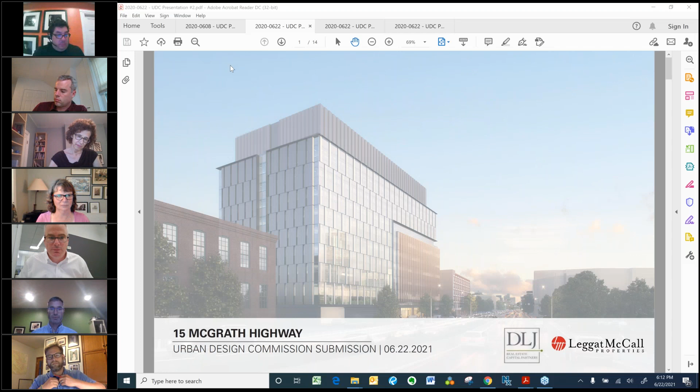All right, so in the interest of time, we're gonna get going here. Again, I'm Mike Gerhardt, I'm the development manager with Leggat McCall Properties. We've got John Sullivan and Ian Ramey here with me as well. John's gonna do the bulk or all of the presentation, supported by Ian. So if he could share his screen, that would be fantastic. We're just really excited to be here. Last time we got the massing approved, and we're moving on to facade here. So with that, I will quiet up and let John go for it.

Great, thanks Mike, good to be back in front of the commission. Can everyone see my screen? Okay, great, thank you. Okay, I'll run through the presentation.

I thought the last session was very productive, and the feedback that we received was really helpful and pushed the design in the right direction in a way that we feel has really improved what we're planning. Let me just move through these initial slides. Last time we had introduced our team, and we really just wanted to highlight what we heard at the last meeting. So we spent a lot of time describing the building, describing the site constraints, which played into a lot of why the building is shaped and located where it is. And our takeaways were that the jewel box was approved.

In terms of the massing approach, we had offered 3 massings, and this one, which we had titled the jewel box, was the preferred one that I think everyone agreed responded best to the site conditions and site opportunities. But what we heard from the commission was that, within the context of this massing, the jewel box piece, which we're trying to emphasize in this important gateway corner, was not differentiated enough and didn't make itself distinct from the rest of the building.

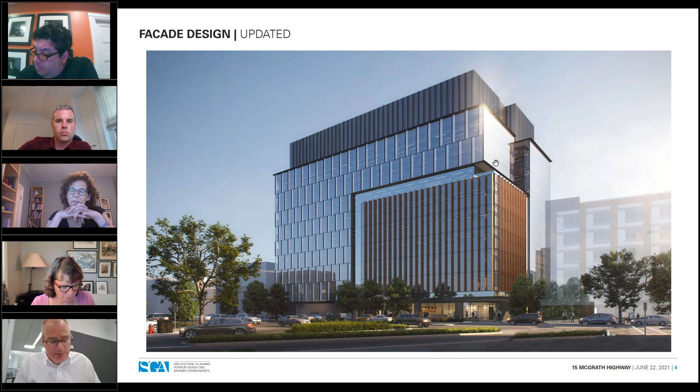So again, looking at the corner element itself, the bigger ideas were focused on materiality, verticality, and separation. But I think an important thing to note is that we've also looked at it proportionally.

So there's a strong horizontal base datum that we've established, which you'll see some more imagery of as it ties into the entry canopy. And then we took this element and lifted it up a little bit off of it. I think you'll see through some of the detail, it feels a little bit more comfortable. Previously, we had the heft of the jewel box coming right down to that horizontal datum, and it felt heavy. This, I think, plays to further emphasize the distinction of this corner.

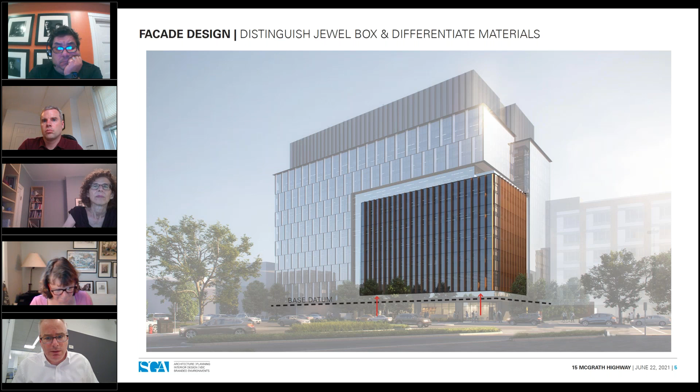So again, just to talk about some of the more detailed moves on the primary facade, we have fins and accent panels that introduce a kind of motion to the facade and create a single story rhythm with some horizontal elements that trace around the building.

At the jewel box element, we've added warmth and texture, and a vertical emphasis that carries past the floors to really express the jewel box as a whole.

And then we've also changed or introduced a little bit more detail to our mechanical penthouse, by providing a vertical, stepped, angled panel that we feel ties into some of the verticality of the jewel box and provides a little bit more of a scalable, stepped approach to the top of the building.

Getting a little bit closer, you can see some of the depth relationships, the typical fins, the accent panels, that give the primary facade some depth, and again that motion that we referred to.

You can see the transparency of the notch, which is inset, but also is contained by these larger wrapping moments to really accentuate that depth, which we feel is a nice break between the two volumes. And then you can see the depth and rhythm of these warmer fins, which we find very interesting.

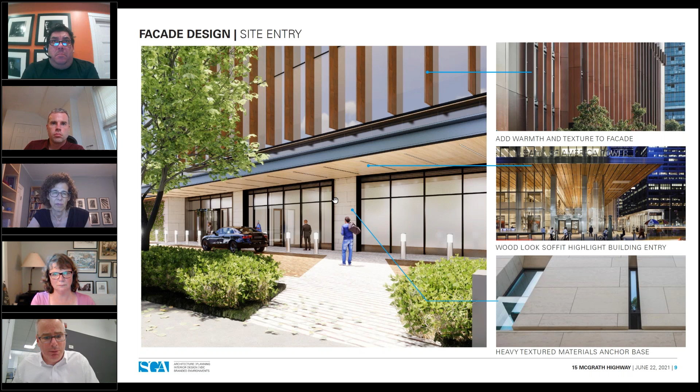Some of what we've already described, like the interest and distinction of the jewel box itself, the presence of that notch, the rhythm of the primary facade with these stronger wrapping elements. These wrapping elements actually turn the corner and contain this facade, expressing as a notch on the other side, so that this facade can break down into two volumes.

We've turned the glass around the corner for a module, and incorporated the same pattern that's experienced on the front facade around the corner, but inverted it so that there are more solid panels with more narrow windows, while keeping that same rhythm.

These are intended to be metal panels that relate and finish to what's being expressed on the primary facade of the building. So we feel like this reads more as a unified volume, which serves to further pronounce the corner and use these notches to create a nice relationship between the volumes.

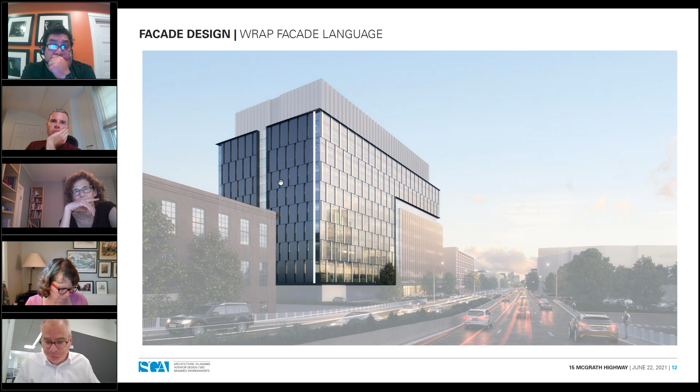But this gives you a sense of the notch on the more solid side of the building, and a similar treatment towards the community path where that main portion of the building turns the corner, and these framing elements start to hold some of the facade on this side, with another notch introduced here.

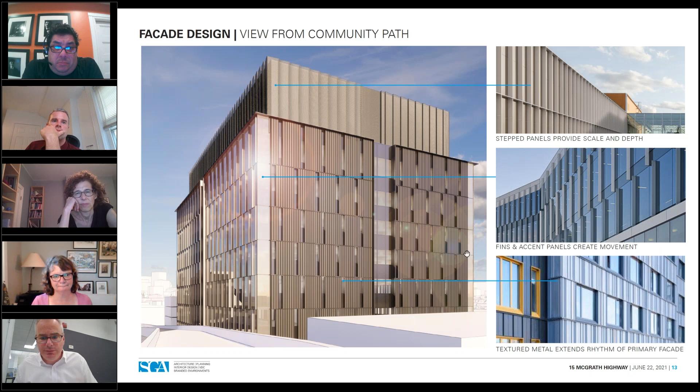So with that, we just wanted to share that as an update. We're excited by the evolution. We feel like it was very helpful feedback to receive last time, and we feel like we're in a much better place than we were during the last meeting, because now we feel like that jewel box really does provide a distinct difference from the remainder of the building.

So with that, I'd like to open it up for questions, and we're happy to share other images from the last meeting and some other supporting material if that's helpful.

So the penthouse, what is the material? You said it's more related to the main body of the building. It's a little hard to tell. It feels a little between the copper color and the whatever. I can't quite tell what it is. It's sort of warm, so I can't tell what it's aligning itself with.

Yeah, no, it's a great question. I think it would be a little bit more of a pewter feel, kind of a darker gray, but with a little bit of a warmer tone. But it's meant to tie to some of the darker gray framing elements and fins that are on the body of the building. So it's meant to speak to the body of the building, but the vertical depth and rhythm plays a little bit off of these fins.

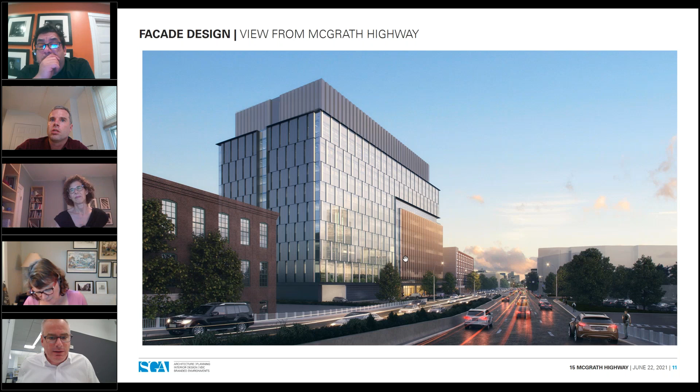Thank you. And John, you also mentioned that notch would be inset, the glazing there from the adjacent facades. Is that right? It is, yeah. I'll just try to move to that image. It's in about a foot. The notch is in about a foot, but the fin that wraps it is also out about a foot.

So I think it presents itself like a 2-foot inset moment. And there's a little play in that dimension, but it's meant to be a break, but we're also using that wrapping element to emphasize that a little bit more.

So maybe I'll jump in first. I think overall the organization of the facades and the clarification of materiality have really come a long way since the last meeting, and I think really make for a much stronger and better building. I really like the introduction of the warmer material, the vertical fins on the jewel box piece, the separation of it from the adjacent facades, the notch, separation from the canopy below, and also the clarification of what you've done at I guess it's the western corner, adjacent to the more solid side of the building with the glass wrapping, and a similar patterning between the solid and more transparent facades that still makes it feel like one building, but clearly something separate related to the specific adjacencies and design of those sides.

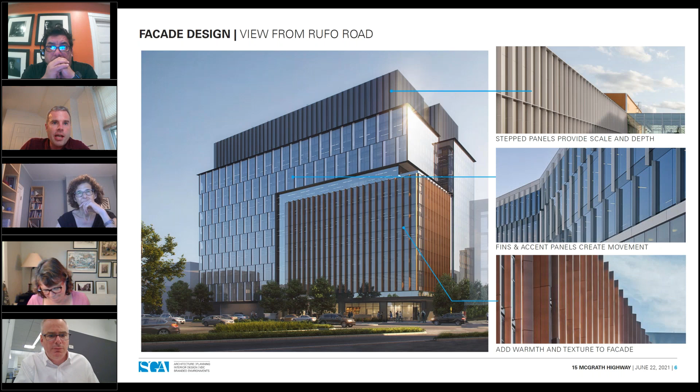I had a couple detailed questions. One was on the canopy. You had the view looking into the entry. And I wonder, so there's the canopy, which again, I think is really nice, is an organizing element, separating the jewel box from the ground plane. It appears that it's extending kind of to the left side of this image, beyond with a green wall below. Could you talk a little about that and the idea for what's going on there, the separation between the ground level and the floors above?

Yeah, sure. No, that's a good question. So this is the canopy, and this carries all the way to the corner, kind of the far end of the jewel box. And from the last presentation, everything to the entry into page right is our active kind of front of house program. So the canopy we pulled out to identify that and to give some more depth there. It's also how people will arrive, and it gives them a little bit of cover as part of that arrival experience. And then everything to the kind of page left of our entry is back of house uses.

Last presentation we talked about some of the constraints on the ground floor and how we needed to organize it. We were pulling this out to emphasize this side of the building as our more active side, and this reveal creates a consistent horizontal datum that felt comfortable. This serves more as a channel to support the primary facade above it, then returns a modest amount to allow that wall to sit in. That will be mostly a solid wall, but we feel it's a good opportunity for planting or some kind of definition.

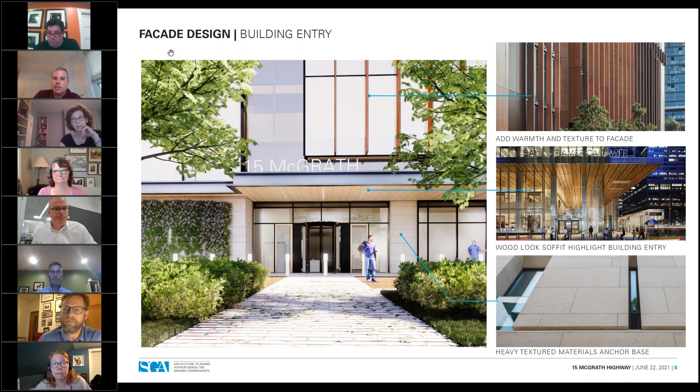I think that sounds great, it sounds like all the right discussions are happening. I'd love to hear from Ian about what's going on inside the property line, but ultimately where I'm going is just hoping there is flexibility inside the property line to accommodate whatever's happening outside it, especially if that sidewalk needs to expand inboard of the property line or shift in to accommodate planting at the curb edge or whatever the width of the cycle track is going to be, or however else that section evolves. So would it be better to review this once things have settled down a little bit, or do we feel there are things that aren't going to change no matter how things settle?

I think there are things that aren't going to change, in as much as the entryway, the easement across the front of the property. It might be that primary car traffic goes in the Rufo Road side and truck traffic comes in the jug handle area, but essentially it's going to remain mostly the same. It's more about the movements that might actually change as to which vehicles go where. But what you're seeing as public realm, right in front of the building, the front door, I think will remain the same regardless.

Yes, thank you, perfect timing. So I'll be quiet and let Ian go.

Hi everybody. This is a plan blow-up that shows what's happening between the McGrath right of way and the front of the building. As John touched on during his presentation, we're really trying to have a welcoming pedestrian experience and turn that shared drive condition, that vehicular condition, into something that feels pedestrianized, that feels like a plaza, with some active patterning that's interesting and engaging and leads the eye towards the key entry into the building. The landscape strip along the property line is about 15 feet wide, as currently shown.

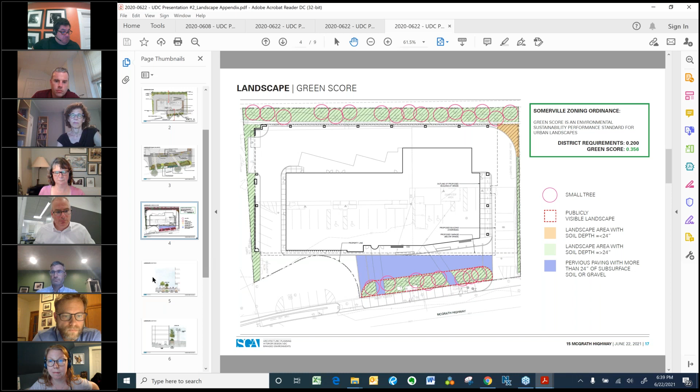We haven't really indicated how the bike lanes and the bus configuration works yet, because we don't really know exactly what that final layout will be.

We did show the idea of a street tree. We met with PSUF a couple weeks ago with Louisa and Andrew. They asked us to look at potentially coordinating with DOT when the time is right to see if we can have some street trees within that 10-foot wide public sidewalk. Again, with a caveat that we don't really know what DOT is going to end up doing ultimately, but it would be nice if we can to have some street trees there.

And then within our property line, you can see that raised planter element, the planting mass that we have there, and then that wide kind of shared drive that engages with the first floor recessed use.

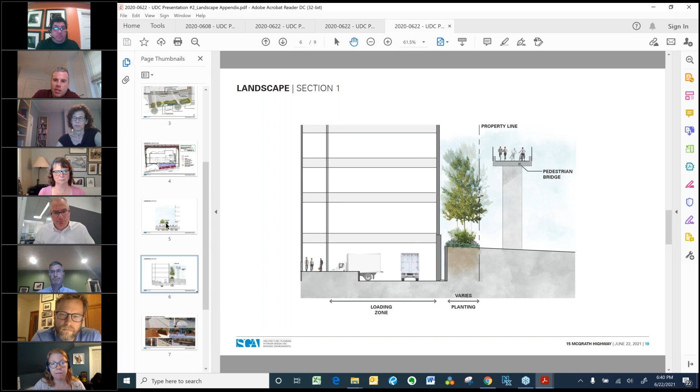So is there the flexibility to take that back of sidewalk line and move it into the property line, which would shallow up the width of the planting strip?

Well, right now it's a 10-foot width sidewalk from the property line to the existing curb. The preliminary plans that we saw looks like they're maintaining that 10-foot width of sidewalk, and everything else that they're proposing is kind of outboard of the curb, basically putting McGrath on a road diet, getting that infrastructure from the curb face towards the main part of the road. So hopefully we can kind of keep the sidewalk line as it is and not diminish that buffer too much.

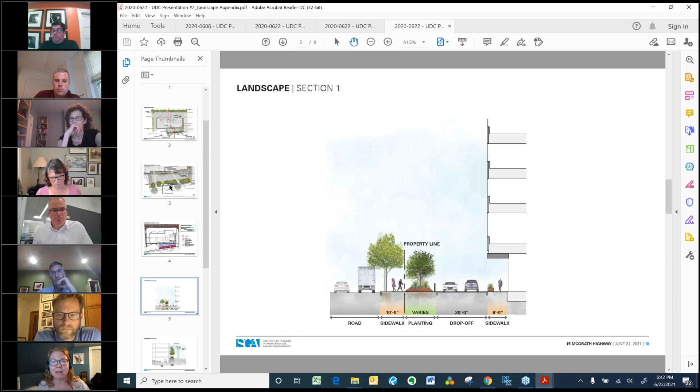I would encourage you all to really think about someone that's waiting for a bus. I know sometimes the floating bus stops, they're pretty small. If someone is shopping at Star Market and they have a carriage, something like that, they're going to wait for a bus. It's likely that they'll actually wait around the sidewalk area and lean on your planter, maybe sit in your planter, sit on your address sign wall. So I would encourage you to think about, in relation to where you want your nice planting to stay nice, that you think about someone waiting for the bus. I mean, they'll probably even sit on the Bluebikes station. So just think about the users, the public using the bus stop.

Sure. Yeah, I think there's opportunities that we can maybe introduce some dedicated seating shelves sort of integrated with the planters potentially.

I really like the planted buffer. I like the idea of tying in the materiality to the facade material, the vertical fins and the planter walls. That could be really nice as well.

It feels like the building itself is very buffered from McGrath, but for the pedestrian realm, the sidewalk isn't. So I get, if McGrath's going on a road diet and we're losing a travel lane and there's the opportunity outboard of the curb to add a dense row of street trees and buffer there, I guess that changes that. But I went out there after our meeting two weeks ago and took a walk down the sidewalk there, and it really is brutal as a pedestrian realm today.

Yes, I guess that's what I'd like to see, a real buffering element in between the travel lanes on McGrath and the sidewalk walking space.

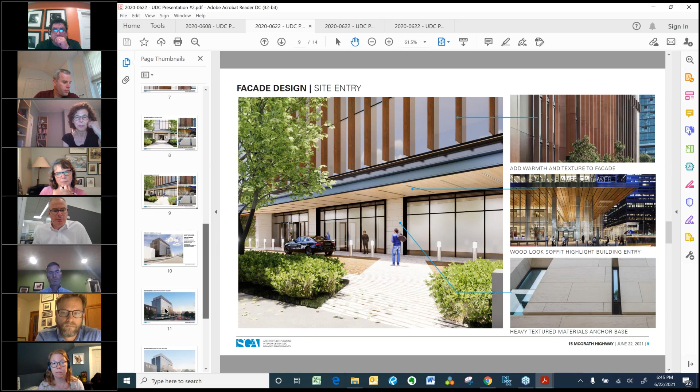And I really appreciate actually the view from on McGrath looking towards Boston. It's the relationship of sort of that facade becomes sort of solid because, if you're tight enough up to the divider, you see it as a solid in relationship to the brick building, and maybe the brick building in the foreground.

Yeah, so I feel like it starts to tie in. I was going to ask, can it repeat anywhere else? And I love seeing it repeat in the landscape, where it actually becomes a tactile thing. So I think that's really good.

I think the area that needs more development for me is where the main facade turns the corner to the more solid, short facade. It's sort of not taking from the language of the section that divides the jewel box from the rest of the building. It doesn't, so it's not framed the way that is. And the rhythm, the alternating verticals that appear on both facades, which I think is nice in themselves, but the way it's resolved as the corner turns isn't successful yet.

I feel like should that solid thing step itself, or should it be framed? Or should it even turn as glass? I'm not sure I mind it actually not turning, the glass not turning, those being framed sections. So I think they have a good pattern, scale, material relationship with those two facades - one becomes more solid, the other's more open. So I would encourage you to look at that corner because I think it's not here nor there.

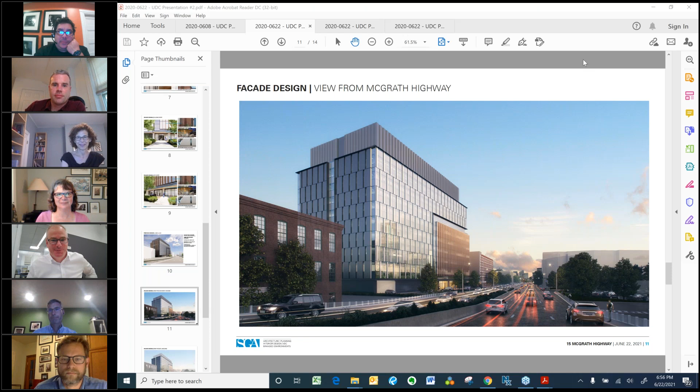All right, well, thank you, everyone. 43 minutes, not bad. Congratulations. Thank you, everyone. Appreciate it. Thank you, John. Thank you, Mike. Thank you very much, appreciate the commission's time. Great, have a good evening. You too.

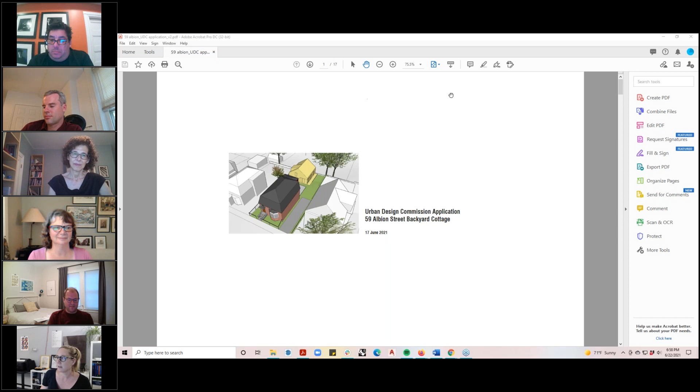So hi everyone, my name is Marilyn Modinger, and I am the architect for this project at 59 Albion Street. We are about to get much smaller in scale than the previous project. I'm curious, I think we understand that we are the first backyard cottage to go through this process. Is that true? Okay, hooray, here we are. Yeah, we've had our first neighborhood meeting, which went very well, and we're excited to present to y'all tonight. So I'm gonna jump right in.

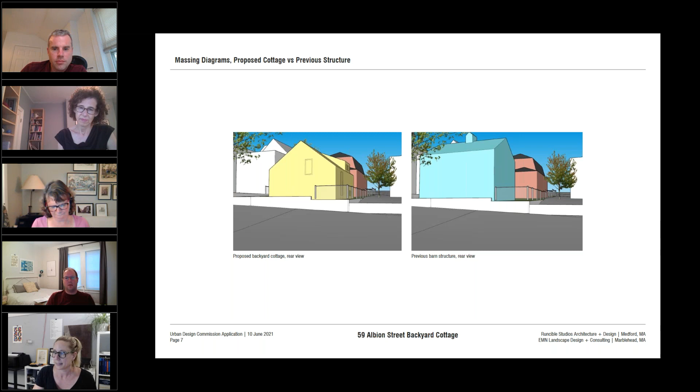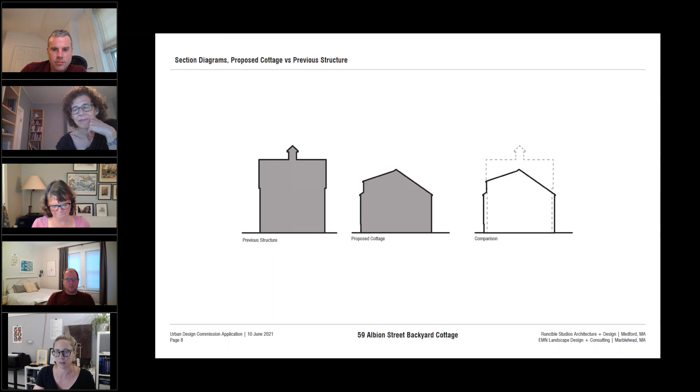And we are up on a bit of a rise, I guess. So the neighbor behind, this is their view of each of those two. And just a little section diagram to bring it on home that what we're proposing is a lot smaller, and again fits with the guidelines that we have been given for backyard cottages.

A landscape plan here, I'm going to ask Elise, who is on the call, I believe, to speak to our landscape plan a little bit. She's our landscape architect. We're not necessarily required to provide this, I don't believe, but it's a big part of what we're up to, so I think it's important to see.

I don't know if Elise is there. That's okay, I can pinch hit. I don't play to be landscape architect, but I can pinch hit. Marilyn, can you hear me now? Yes, there you are, Elise. I am unmuted. Yes, okay.

It would have been great if I had thrown in a previously existing condition, but what we are looking to do here is shorten the driveway. Can you see the mouse, if I move the mouse? There we go, Marilyn, that works.

So the existing driveway used to go all the way down to the barn. So what we are doing is shortening the driveway and reducing the impervious paving, and creating a small play lawn in the back, which is fairly consistent with, if you look at the surrounding yards, what the yard space is.

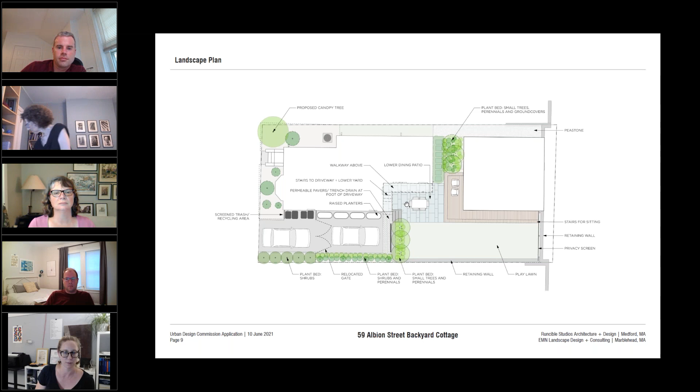That's a great reminder too. I should have introduced our clients, Kate and Daryl, who are on this call. They bought this house about 6 years ago and plan on staying. This is their forever home, and they have 2 kids, and they want to make it into a space that really works for raising children here in Somerville. So the realities are having space to play, legit real parking spaces, not reducing the amount of parking, but also making sure to have practical family things like a trash and recycling area, raised planters for tomato plants and things like that.

So the backyard cottage itself, you saw in our application, is a non-commercial building. It is not planned to be used as a residence or as a rental. It is strictly used as recreational space for the owners. We're putting a bathroom in, but not a full kitchen, and we are not extending the driveway, which would mean that we cannot use it as a residential unit, and that is not what the owners want to do. So it is strictly for them, recreational purposes.

So for elevations, I'm showing all 4 of them. If you saw the packet ahead of time, technically we only need to show and discuss the one that faces the front lot line. This is a little bit funny because the one that faces the front lot line is right here, so we're following the rules. That's this facade right here. But we've designed the rest of the building too, because it's little and we can't really design the facade outside of thinking about the inside.

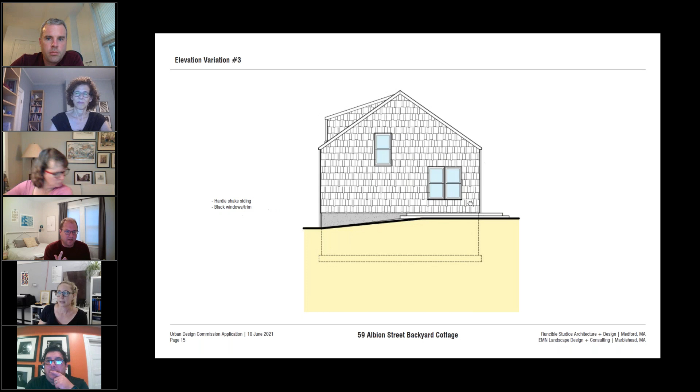So the rear elevation, that's just exposed concrete on the neighbor's yard, is that correct? It is, yes. And that is because the forces generated from the rock climbing wall are pretty intense, so it has to be a solid concrete wall.

It doesn't seem like the friendliest facade to expose to the neighbor's side, especially, I mean, I understand this was previously a barn that was not great, but I would imagine the facade on the barn was probably fairly nice, and I would hope there's some way to do something a little bit better than that.

How tall is that concrete on that edge? This right here is about 8 feet, probably right here. The grade does drop off. There's an existing retaining wall. This has been quite an ordeal.

There's an existing retaining wall that the barn had collapsed backwards onto. And so at one time it was certainly nice. At the time we took the barn down for the last few years, it was not, it was pretty rough. But I agree, there are certainly some things we could do here. I certainly have some ideas about what we could do there if this was a problem. The detailing gets tricky, but obviously we can figure that out.

Are you considering a form liner finish, or any other treatment, or coloring of the concrete or anything like that? No.

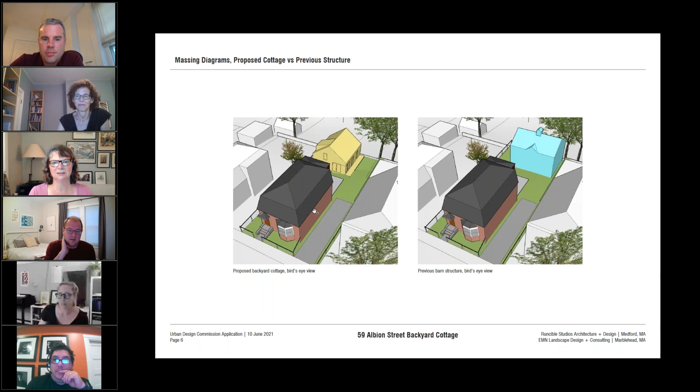Following up on that, is any of this really visible from the public realm? It seems, based on this, just barely. The way I understand what we're supposed to be submitting is the facade, and we're supposed to talk about facade variations for it. When I looked up what facade means according to the ordinance, it's the face of the building oriented towards the front lot line. So I read that to be this one. When I talked with our team helping usher us through planning, they confirmed it's this facade right here, which is why I focused on that.

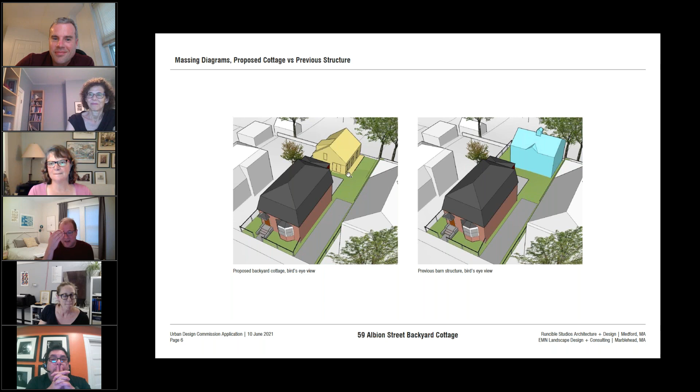Between you, me, and the public, it does seem kind of strange, but that's what I think if we're following the letter of it. Yeah, I think if this were rendered with the actual landscape plan on it too, there's a gate and trees there. It's not visible at all.

Yeah, it's not. The idea with those trees there is that they're Amelanchier, which is a 15, 20 foot multi-stem tree, to actually give them some privacy. It's not a wall, but it helps screen.

So basically, if I understand it correctly, everything this project is doing is by right per the new zoning. They're doing everything within the right of the new code. So it's saying that we are privy to a review of the elevation facing the main street.

You presented three patterns of elevations. I'm really not going to sit here and tell you personally that I prefer horizontal, vertical, or shingle. I think they're all successful. You seem to be a qualified architect, and I think you're doing a great job. I'd leave it up to you and your client to pick what's most appropriate within the context of the neighborhood and what you're presenting. I don't think it's for me to give you a selection of a pattern. If that's what we're privy to do, I think you've done a great job in the massing, I think it's doing everything within the zoning, and I think it's a great addition.

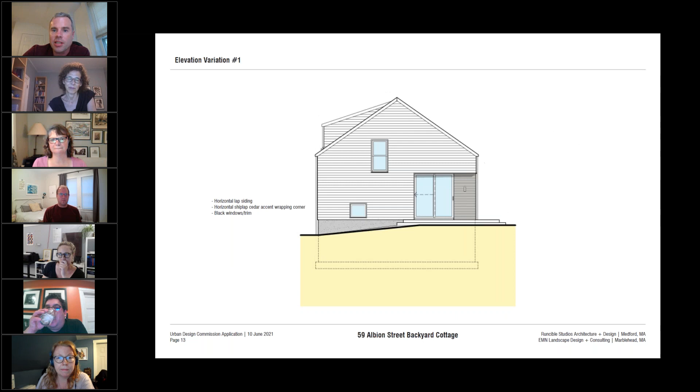I only had one comment, a question for you, Marilyn. I'm curious if you can talk about your approach. I know there's been a couple notes saying colors shown are really only diagrammatic. I think one of the renderings showed a black roof, and maybe the existing mansard roof is black as well. I'm just curious about your approach to color and materiality, especially as it relates to the existing home on the site. Yeah, absolutely, totally.

These images give the best view. We're looking to do primarily a dark structure. What we have currently in our drawings is a corrugated galvalume roof, a very typical barn type roof, so it would be shiny silver. I picked all the things that are hard to do in quick renderings.

This isn't quite the project with the rendering budget that our previous project had. So it would be very similar to these, darker earthier dark colors with these pops of cedar, and the corrugated metal roof.

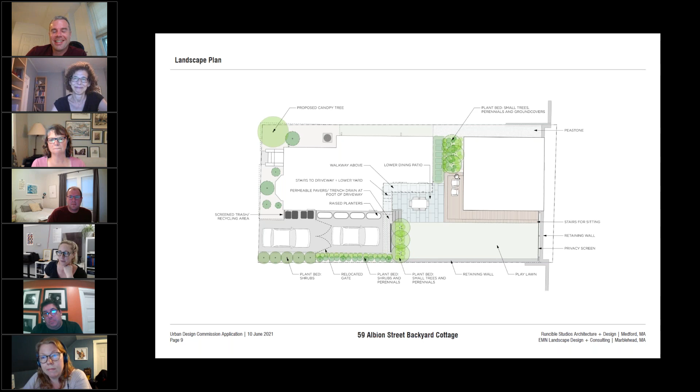There's a new rule about whether decks can be within the 10 foot separation—buildings have to be separated by 10 feet, and now there's talk about whether decks also have to be separated by 10 feet. If that's the case, this will become a patio and we'll miss this cool wraparound with the steps.

But we'll roll with the punches—maybe a flush deck and then drop the play lawn down 6 inches on that edge.

Oh, that one's free. So maybe we'll break our land speed record—I don't know if we want to go ahead and vote. Yep, yeah.

Alrighty then. I'm scrolling through the ordinance right now to figure out what we actually need to vote on.

There are some design standards within the backyard cottage itself. Those have been met—they are not guidelines, they are standards, so those have already been met. The design guidelines under the NR district have more to do with...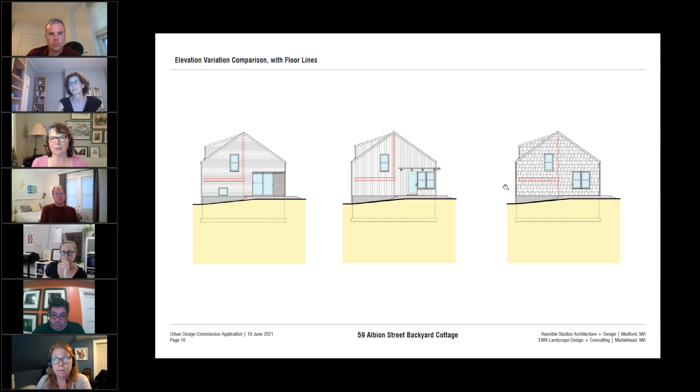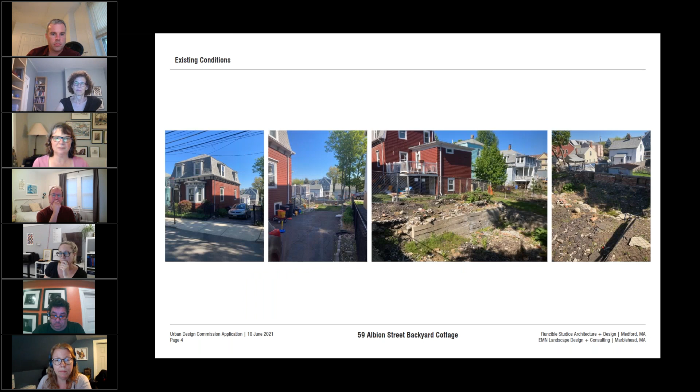I suppose the question might be on the side elevations abutting property lines, whether you would like the lower windows to be half opaque. I think that's in the realm of discussion.

Otherwise, I think the only vote we need to take is that the design guidelines have been met. Motion that the design guidelines have been met. Andrew Graminsky, is that your understanding as well? Yes, and just to confirm, it sounds like the commission is leaving it up to the architect and client to come up with the preferred front facade.

So I guess should that then be a vote, that the commission moves that the client chooses the best approach for the facade option. Or Marilyn, is the preferred the one that you have presented to us as the preferred? That is the preferred, they're just one, choose the preferred. Maybe it's more straightforward to just say we approve the preferred, the one you presented as the preferred.

Okay, so then I need a motion that the preferred schematic design meets the design guidelines, and all design guidelines have been met. So moved. Second by Tim. All right, roll call vote. Deborah, yes. Tim, yes. Andrew, yes. and Frank, yes.

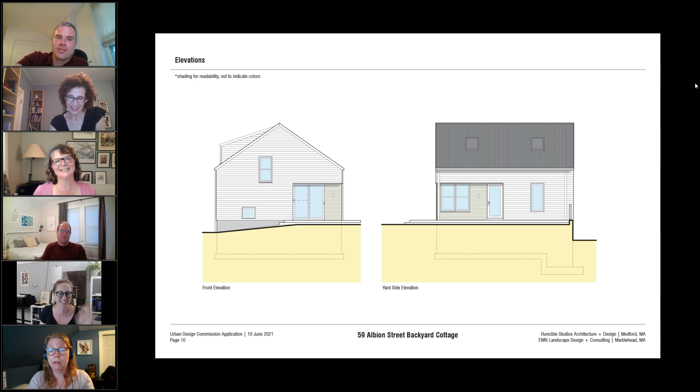All right, congratulations, team. You have an approved project, and you did make it within your time allotted. Great, thank you so much. Just to be clear, because I stepped out for one second, we made sure to approve this one. I've been down this road for 3 years now, so we approved this one. Okay, that's it, great, yes. Hooray, thank you so much, everyone. Thank you, have a good evening. Bye, thank you, thank you.

All right, so then the next up on our agenda is the last one, and that is 599 Somerville Avenue.

Sarah, I will be recusing myself from this case. All right, so noted, thank you, Courtney. Have a good evening.

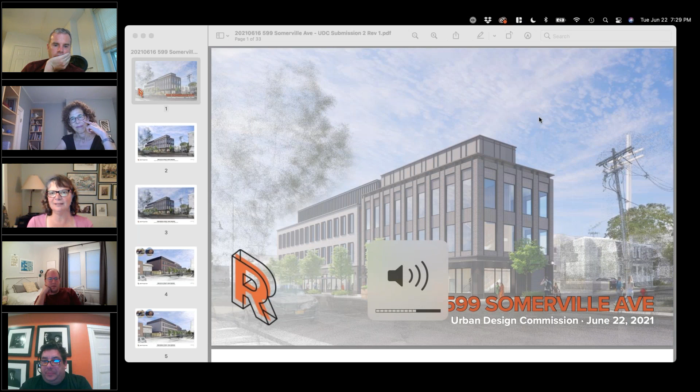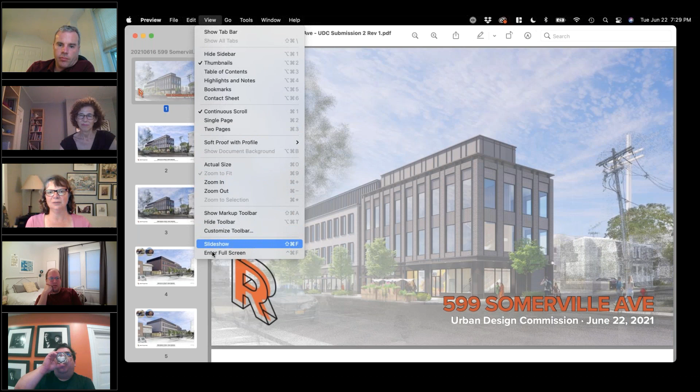Great, well thank you everyone. My name's Russell Preston, I am the Design and Development Director for this project. I think we have Nina Chase and Rob Elfer joining us. Rob is from Studio Troika and Nina's from Merritt Chase Landscape Architects. We have a short presentation for you all tonight. Just to confirm, you can see my screen, right? Seeing some nodding heads, great.

Okay, so I'm going to take you all through this. I think we had a great discussion about the building last time. We spent a lot of time with the design team really digging into 3 general areas that you've asked us to look at: the facade color, the materiality of the facade, the design of the facade, particularly how it relates to the seam between the 2 facades of the building, and then really looking at the landscape buffer on the northern yard of the site.

So, from a design standpoint, this is really trying to be... it's an MR3 building. It's only 43,000 square feet. We're trying to deliver a commercial building that's at a neighborhood scale and is really lab ready.

So, the direction you all gave us last time was really to look at option 1, which was a 2 facade scheme, but look at the relationship of the seam between them and rethink the color. So we've really brought in much more gray and darker brick tones to the facade. We've gotten rid of the red brick, as you see on the left. And the other thing we have done is really start to study where along the facade that break between the 2 facade designs needs to occur. We'll get into that more in detail.

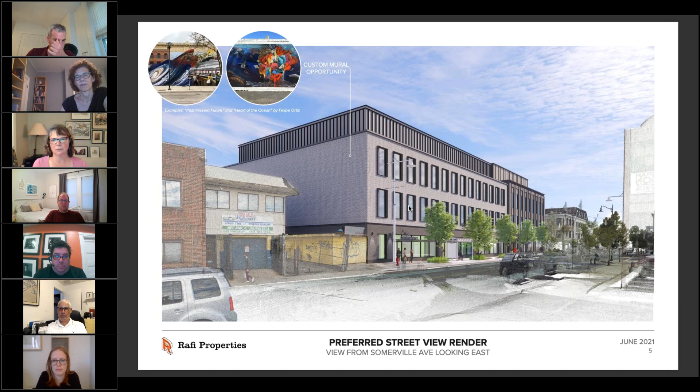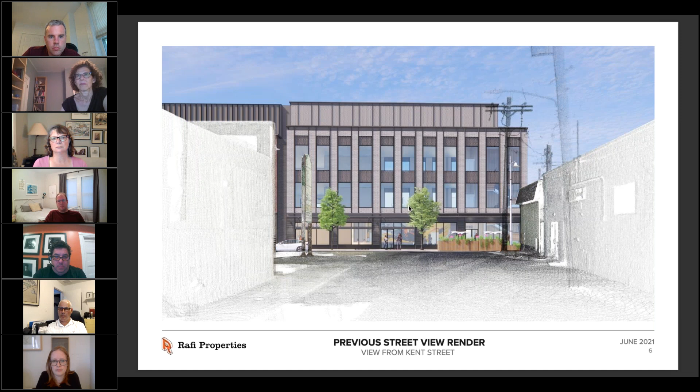Looking at the previous design here from Kent Street, it was important to us to understand how this facade not just related to Kent Street, but how it really related to the corner of Spring Street. I think the commission pointed out an appropriate move here, which was to slide over this seam between the two facade designs, and what that does is essentially line up with the lobby, the demising wall in the lobby.

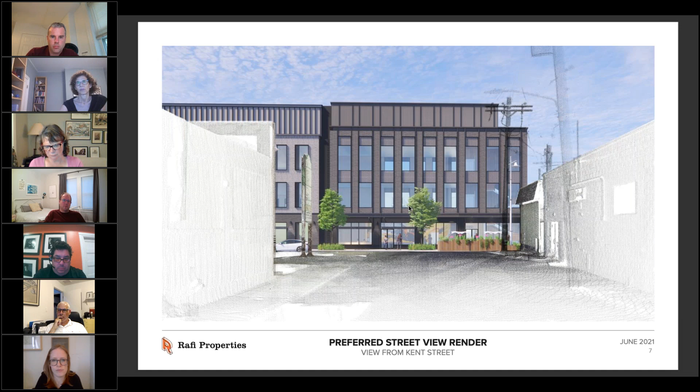I think the fiction we're creating with these two facades will be further enhanced by the relationship it will now have with the lobby on the ground level. A lot of care has been given in the architecture here by Studio Troika, with the width of the piers jockeying all of the relationships of the facade with the column grid inside, so that we really do have two successful building facades there.

In the previous design, looking down from Kent Street, we tried to scale that corner element to be able to turn the corner and feel like it was at a scale similar to the other mixed use and multifamily buildings along Somerville Avenue. When we reincorporate the color palette you directed us to, being more in those whites and grays and lighter tones, it starts to tie the building a little bit more to the clapboard and wood architecture rising up the hill here.

I think the goal here from the development team standpoint is to really build a durable building—something that not only speaks to the architectural heritage of this corridor, a mill building inspired facade, but something that's also contemporary and really going to speak to the nature of what could be happening in and around this building.

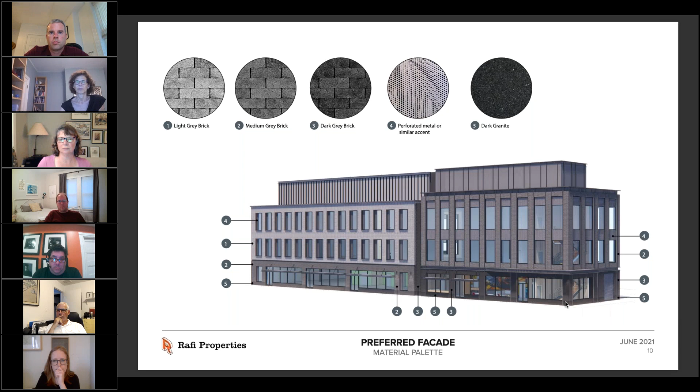So we're looking at light gray bricks, medium and then darker gray, really trying to speak to these being both very different facades but also in a similar palette of materials. And then the perforated metal panel could articulate not just the spandrels between windows, but also other ornamental elements, the canopies and sound screens on the roof. And then really grounding the building at its base with a durable material like granite, so that we have a nice water table at the bottom of the building.

You can see here a few more facade views—this was the previous design. We had a lot of internal debate about which way to shove this seam, and I think the commission directed us in the right way. I was convinced by some of the studies our architecture team did that the success of the building on the left now is really this punched opening.

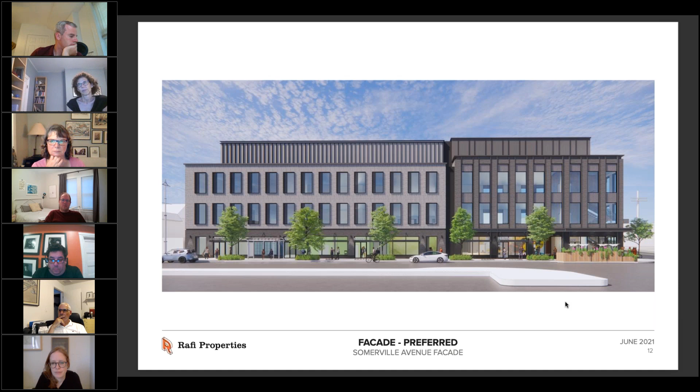It really accentuates the horizontality of the facade and has a strong presence along the street with a rhythm to the storefronts. The corner element is expressing the vertical nature of those piers and really tying into holding that corner, and the scale of that is now more appropriate with other buildings on the corners of the street.

You can see the previous design here and then reworked with the direction from the commission. Further study—we'll talk about landscape as well—but really looking at this corner has been important, not just from a public realm standpoint, but how that facade will talk to this expanded parklet or larger curb bump out.

What we've also been working on is understanding how these buildings, from not just the ground level but all the way up through the facades, can really speak to them both being their own facade. You'll see we've really worked the detailing of the penthouse noise walls, some of the cornice elements, a lightweight contemporary language to it, but still trying to make them feel as if they're separate buildings.

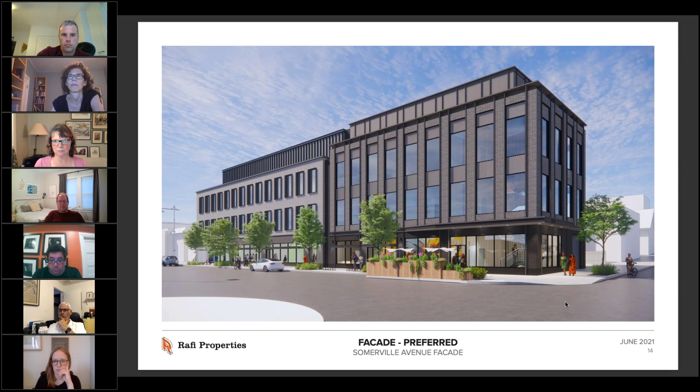To reinforce the preferred direction the commission focused us on, I asked the design team to look at what would happen if we expanded the corner building, the right-hand facade, further down Somerville Avenue. This study reiterated the success of the preferred scheme here and how that corner element of the building is right-sized now.

Another element you asked us to look at, and where we'd love to have your guidance tonight, is understanding that the success of this part of the ordinance is really to create a smaller increment of facade to break down the overall massing. I think the seam between those two facades, we've had a lot of study on it. This approach is really looking at making a non-event, something that when you're walking past it along the sidewalk, is a forgotten moment.

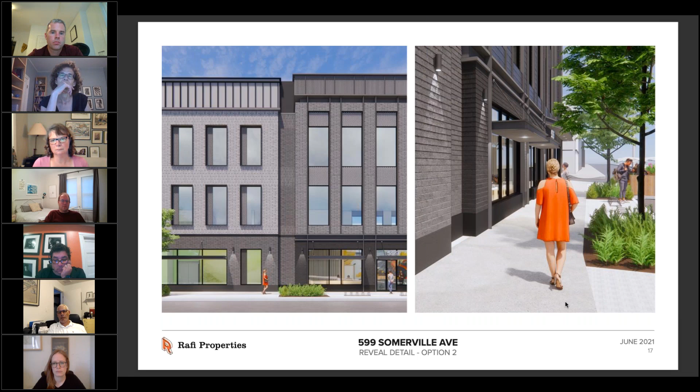We've also been working within a design constraint here with a pier, a structural member right there. So we've tried to create a condition here that's a non-event as you stroll along the sidewalk. Option 2 is thinking about creating a minor bay to the left-hand facade, continuing the detailing of the brickwork and the string course coming along at the shop front cornice, creating a minor bay but with similar language to the left-hand facade. You can see that on the sidewalk experience.

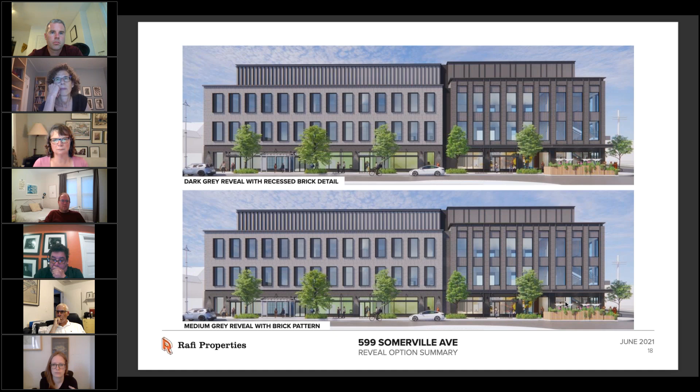And then these are just side by side. I think the success of these two facades is really about how their proportion is right-sized now, their overall length is right-sized. I think this seam is just a detail we'll continue to refine with your guidance as we move forward into further elements of the building during the next neighborhood meeting.

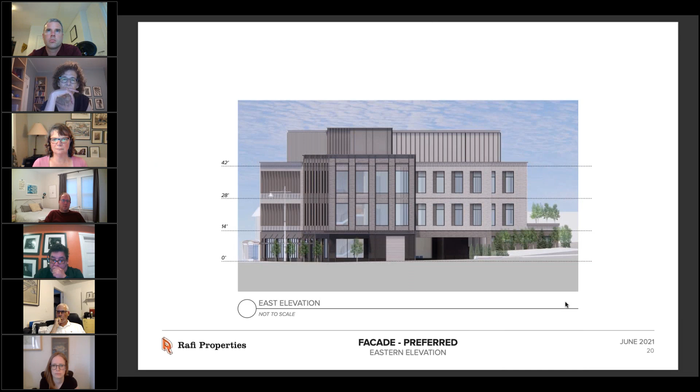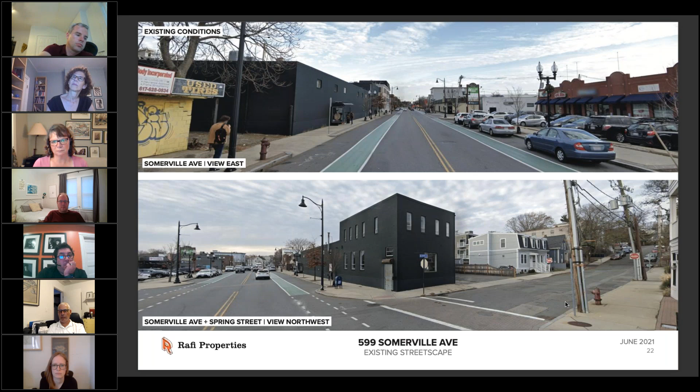Related to that, it might be helpful to talk through the landscape and the rear buffer, because they're related to some of the architectural moves we've made. Overall the site is a very hard site, it has a lot of coverage. This is the wide loading dock along Spring Street. So the layout of the site has really been about how do we stitch this new building better into the neighborhood than what exists there today.

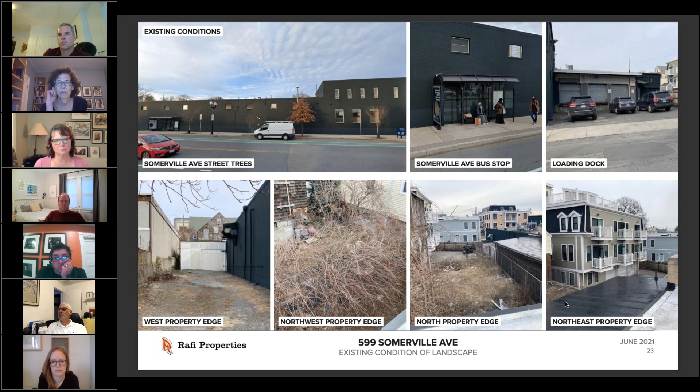Very little landscaping around the site today. Its relationship to the abutters to the north is very much right at the property line. So what we've done, after a number of working sessions with the team following our last commission meeting, is look at several moves here from a site standpoint.

We've had several discussions with city staff on the streetscape along Somerville Avenue. We'll continue to work with them on refining that, in the context of not just the corner bump out and the bus stop, but they've given us direction that we really need to work within the city's specified standards on those elements. We've had several discussions around the corner bump out and how to right-size that. The city has asked us to look at the crosswalk there, which we're going to continue to study.

Moving up to the northern landscaped yard, in talking with the neighbor on Spring Street, we're really looking at addressing some of their concerns around the active driveway in regards to noise. So we've extended that landscape planter all the way to Spring Street and are conceiving new fencing there as well, in relationship to that abutter's parking lot and driveway.

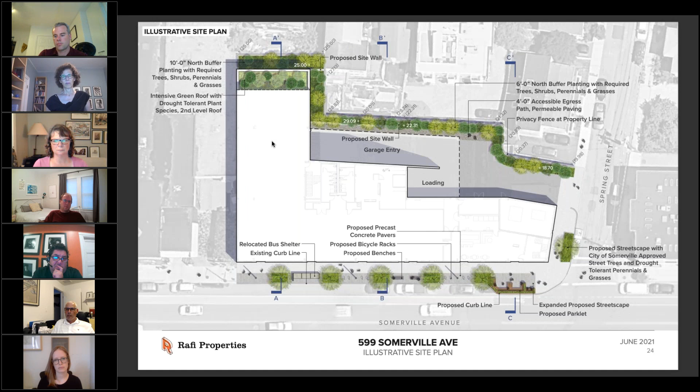We've also looked at taking advantage of how complex the topography is. You'll see on these drawings we have three sections we've cut to illustrate how we think we can use this landscape yard to better connect to the experience the neighbors to the north have of the project. And then the final element here is the change to an intensive green roof at the top left corner, thinking about how that part of the building can actually become part of the rear yard experience to the neighbors to the north.

So just looking at that section in particular, this is the deepest part of the site. And what we've done is really raised that landscape yard up so that visually it connects better to the rear yard of 44 Pitman.

By the setting of all the grades around the site, we've been able to bury the building into the hill. With the inclusion of the change to an intensive green roof, we'll have additional tree plantings and more robust landscaping there. Overall, you'll get this layered and terraced view that will result in approximately 23 feet of landscaping in that situation.

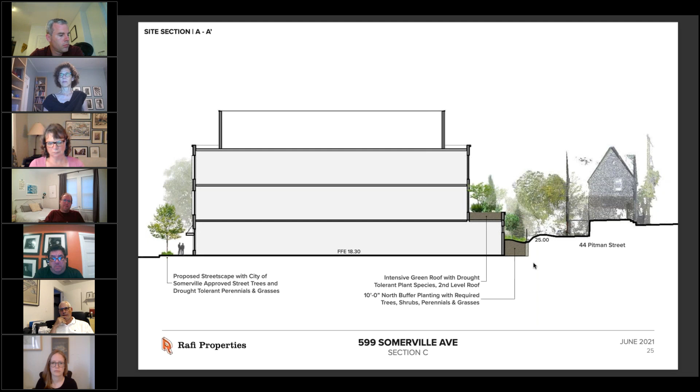What you'll see there is the small 4-foot egress path that needs to come out of the rear egress stair of the building, which will just be a utility path running along the rear facade. The final section here is a cut through the driveway, just off Spring Street, showing the inclusion of a new planting strip with the shared driveway condition we have with the neighbor to the north.

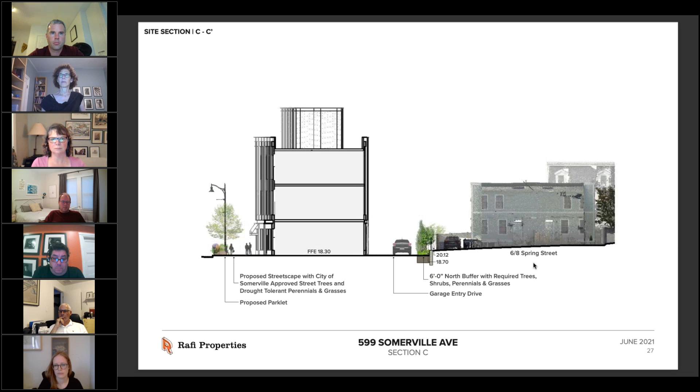Overall, we've really worked to maximize this unique site, stitching in this infill building with all the various situations we have with the topography. Doing that, we've enhanced the green score. We were at 0.31 before; we believe we're at 0.35 now. We're going to continue to review this with the staff.

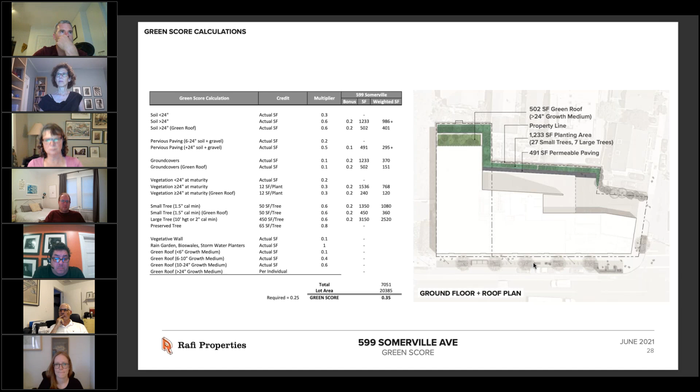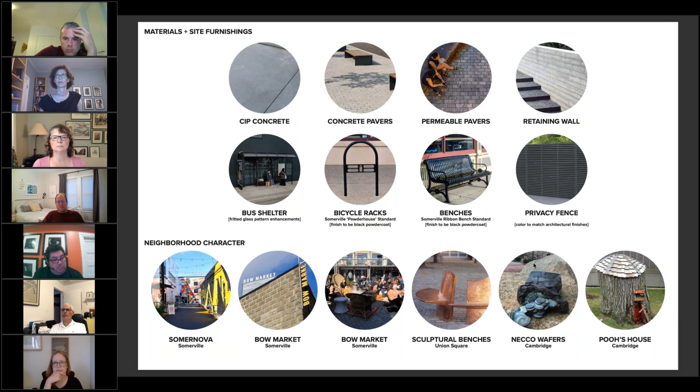The material palette has evolved a bit. We've brought in the standard streetscape elements, furnishings, and materiality that the city has directed us on. We're looking to continue to get input from the neighbors and community at our next neighborhood meeting about the opportunities we have at the parklet or corner bump-out situation, and we'll further refine that design as we move forward.

Overall, we're taking a very harsh, hard site and bringing in as much green and landscape as we can, given the context of this unique property. This final image ties together the idea that it needs to be a Main Street building—it needs to participate in the improvement of Somerville Avenue. I'm thinking about how this parklet can be designed with the community.

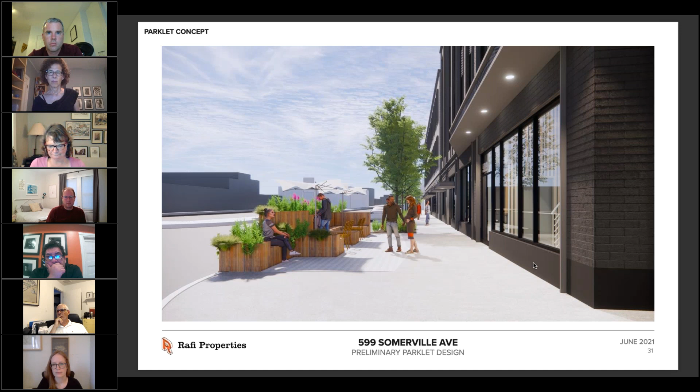The further study the city has asked us to do with a crosswalk here, and right-sizing this bump-out in the context of all the other moving pieces with the bus stop and other elements of the streetscape. We're really excited about the project. We're going to continue to work with staff to refine the planting list, working with the specified native species in the ordinance. Overall, we're thrilled with how the building's come together—I think it's a beautiful building, and would love to hear your input on it tonight. So thank you.

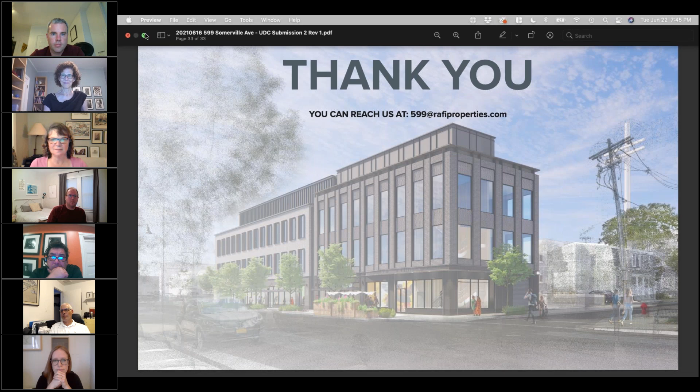All right, how do we want to proceed with this discussion? Does anybody want to just dive right in? I don't mind actually starting.

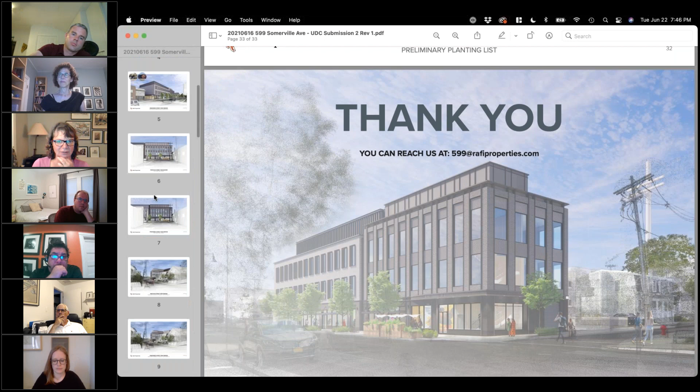Russ, can you go back to the slide that shows the dark slot between the two, particularly the view from the street? Is that actually recessed bricks for a zipper detail? That is the thought there, yes—that there would be some sort of intricate masonry seam there to tie that element into the two facades on both the left-hand and right-hand side of the building. There's something I really like about that zipper—I noticed it, and that's the way it read to me. So anyway, that's my only comment.

I took a look at this presentation before you presented it, and when I came to the image of the shifted reveal, the change in the proportions of the building, I thought, wow, that feels really successful. I think the change in proportion, shifting that away from center, gives some type of programmatic justification for differentiating the two building facades by aligning it with what's happening on the ground floor. I think it just works proportionally. It feels good to me.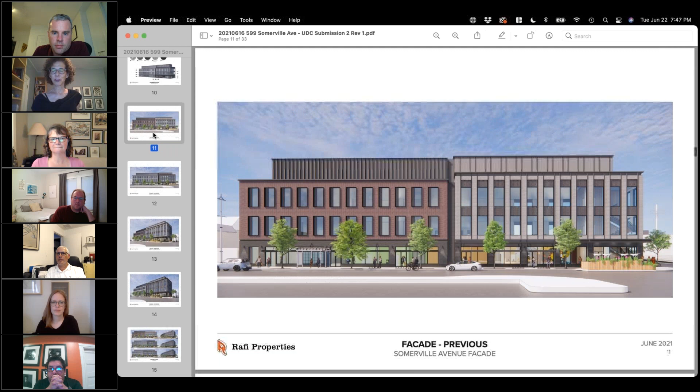I agree, Tim. I feel like now your vertical section is more vertical and the horizontal section's more horizontal, so it's supported by the way the facades are differentiated. I think it's very successful too.

I think in general you've done a lot of work, and you've thoughtfully incorporated things that we left dangling after the last conversation. The architecture is quite successful and I have very little comment on it. I'm a little confused by some of the landscape, how the grades meet the building in the back, and I'd be interested in hearing Andrew's comments on the development of that. But I feel like the architecture has fallen together in a really good place for this project, given its program, scale, and ambitions.

Great, thank you. Yeah, I can jump in. Oh, sorry, you want to go, Tim?

Just one quick one while we're on this slide. This shows the corner condition where there's the lobby at the corner, and I'm realizing there's a stair connecting the different levels at that corner, which is different from the other window bays on this facade. I'm curious about your attitude toward that stair on the inside, and whether there's any further opportunity to create differentiation at this corner—so perhaps the repeating bay isn't simply wrapping around the corner the same way it does on the back side, but something related to that taller space on the inside.

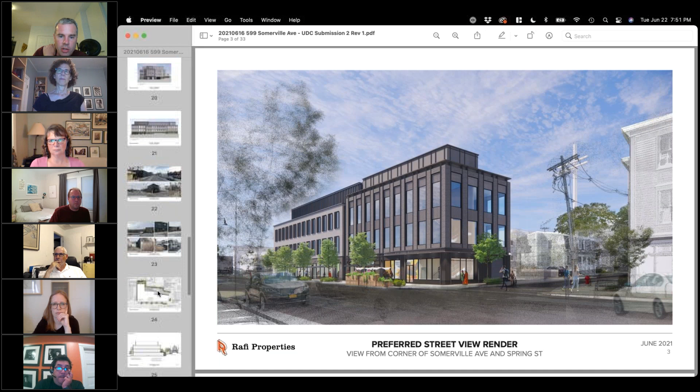Does that make sense? I think so. It makes sense. On the other hand, so many buildings of this typology are center-core buildings with tenant space around the perimeter, so you get a very similar facade. This is unique in that it has a stair on the corner, a big vertical communicating element. So as a refinement, I'd encourage you to continue exploring whether there's an opportunity to celebrate that and differentiate the corner, while still accomplishing what you're talking about, Russell—the singular pavilion-like nature of that piece.

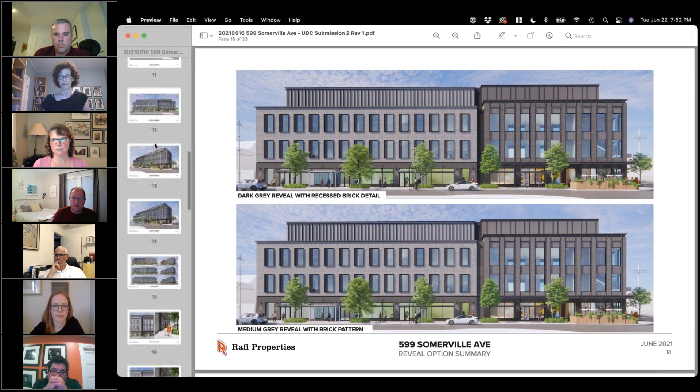I would definitely echo some of the comments that Tim and Deb have already said. Architecturally from the front, the building looks great. I think the shape and the massing works, I like how it looks from the front a lot. With regards to the landscape, we covered last week that the streetscape seemed really solid. The parklet seems like a great idea.

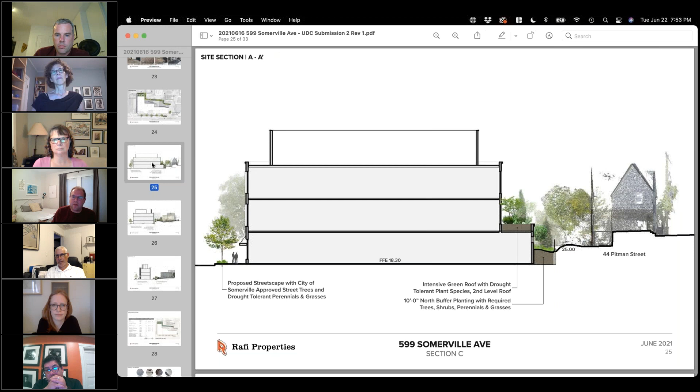The landscape in the rear remains a concern for me. I think you guys have clearly put work into trying to make the 10-foot minimum work better, but for me it remains a case where the minimum per zoning does not seem adequate. I appreciate the changes in the topography to try to get it to the right levels, but it does reduce the planting areas in places where we're raising it significantly with the walls, because the walls themselves are taking up a certain amount of that 6-foot space at this point. I just think the answer is to provide more space rather than try to see how we can get that up and down in the grading to work.

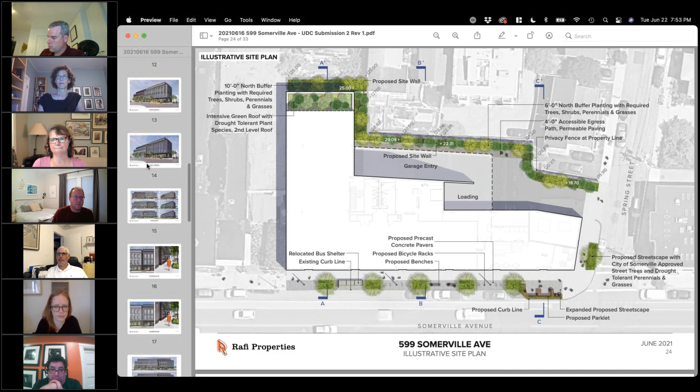But the rest of it I really like.

I've got maybe two questions for Rob. Wondering if you could talk a little about two things. One is the coloration of the brick — I think in general the tonal similarity between the two feels good as well, and I know that was something we talked about last time.

Within that gray and dark gray range, there's a broad variety of approaches. I'm thinking of a mock-up I go by almost every day in the Seaport right now, the gray brick building — I can't remember the name of it, but it's a really textured, weathered gray brick, as opposed to something more solid. I'd be curious to hear what you're thinking there.

And the other question I had was for the more vertically proportioned facade, there are the black vertical bands. I can imagine that's separating the brick pier from the window, but I'm curious where the vertical band is separating dark brick from dark brick at the top and the bottom, how that detail would work.

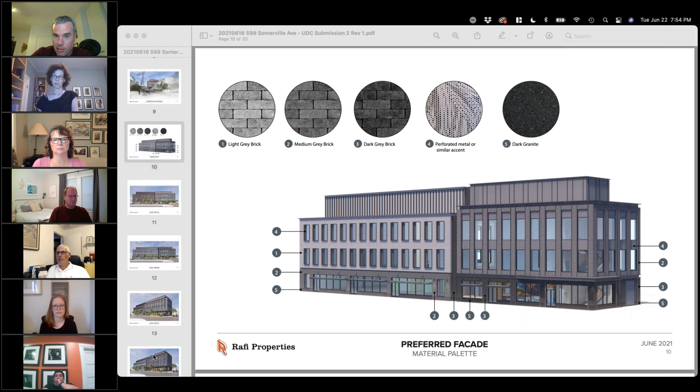I think at this point, the concept of what the actual final brick would be — there's definitely more time to research that and look at options. I believe the building you're looking at has more linear brick that's textured; I think that's the one you're talking about, which is really pretty. So I think we can play with that a little bit more in this as well. We've tried in this case to just be a little subtle and not shout too much.

It's the type of building that you don't want to try too hard with everything, so we really want to find that elegant, subtle feature and how all these elements come together. But I think we have looked at a slightly more textured option — it's a little hard in these renderings to really have that come through, so don't imagine it's completely flat, and it's definitely not a gloss brick.

So to answer that question, the linears you're seeing, the vertical black strip — if you zoom into it a little bit, that was layering into that building a different layer of detail. It actually starts to play with the planes of the building, helping to emphasize the verticality, and then having these metal elements tie throughout the building, so you go from the base all the way up to the top. You have this commonality, the detailing that works its way through.

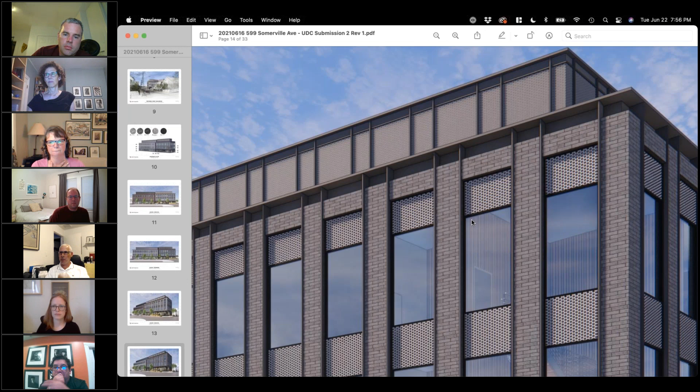It's really more like a thinner black, not as large as we were talking about in the first project you were looking at, but something a little more subtle, coming out about 3-4 inches, contrasting these metal accent panels. So really creating a lot of layering was the idea behind this scheme in this part of it, and that's trying to act as a contrast to the other one, but also bringing a tiny bit of that detailing into the other building as well.

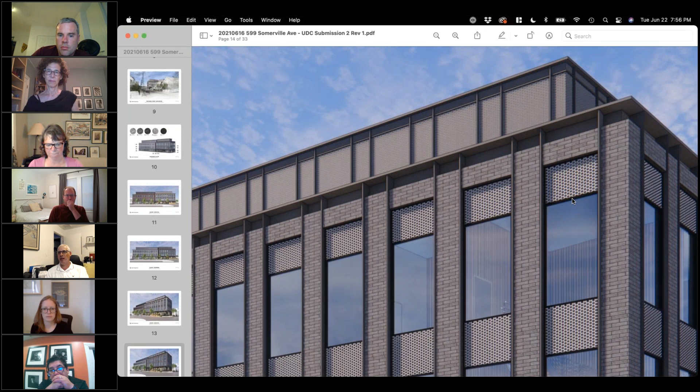So if you zoom across, you'll see hints of that detailing come into the other piece of it as well — a little hard to see in these renderings though.

Just speaking to your question on the stair, the one thing I'd add is we definitely want to celebrate the stair. There are a lot of different ways to do it. I think what these aren't really fully looking at yet is how we're going to start to see those interior elements from the outside, lit at night or in the day. It could be things as simple as colors and the way you get that luminosity coming through some element of the lighting, kind of like a Steven Holl type effect, which is kind of what we've had in the back of our head for this. So I know what you're talking about, and we totally appreciate that. We'll definitely be looking at that. It is a rare opportunity.

Yeah, thank you. Sure.

Is the parklet on private property or on public property? That's the question I had. So that's on public property, and we've had a couple meetings over the last few weeks with the city staff and are digging into that in more detail now with them.

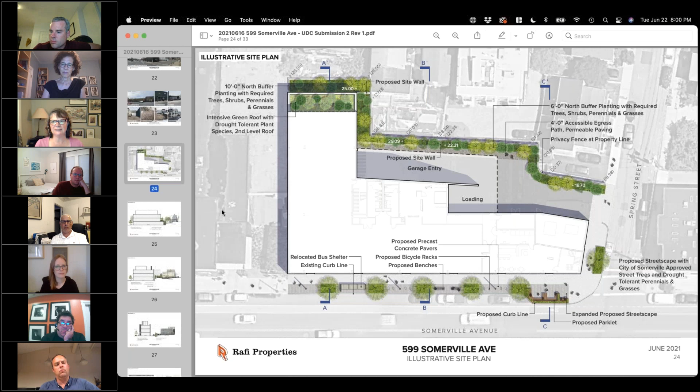All right, is there anything else? Are we ready to vote? I don't mean to rush, but I feel like there's a lag in the conversation.

Well, maybe can I go back to the zipper, between the two? I just wanted to make one last comment, and when you're done, Tim, I want to make one last comment too. I guess maybe I'd be interested in hearing, Rob, your preference on which option you like.

But I tend to agree with Sarah. I think the zipper idea is something that is both architecturally consistent with the two buildings, but also something a little whimsical and fun. The Somerville Historic Commission has this thing where they'll take really close-in pictures of different areas around the city, and you have to guess where it is, and they send it out to people. This could be something really unique, they take the picture and send it out to people to guess.

Yeah, and my comment is, I feel like this is one of the most successful long buildings that needed to have definition between them, but holds together in my mind as a single building. It feels something authentic about it. So I applaud you guys, I feel like you really pulled this off. I think it's pretty tough to accomplish that, to divide this up into 2 or 3 sections and have there being integrity to the whole project. I feel like you found a nice balance. I've been looking at the details on a larger screen, and the brick work, there are datums that carry across, but there's just a sort of integrity to the way it all holds together, and I'm pleased by that.

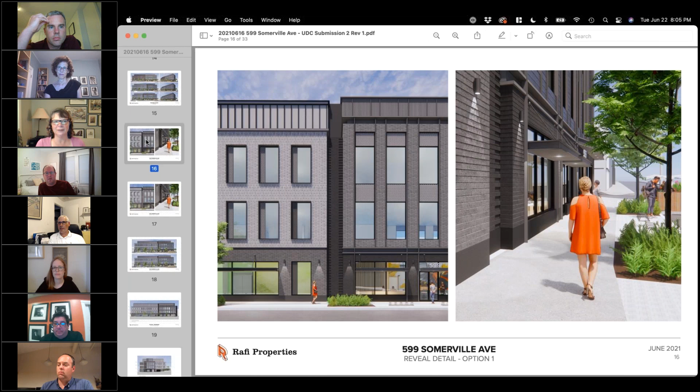I think that's a clarification, just to make sure that we have all the selections chosen. Do we want to designate a priority design guideline?

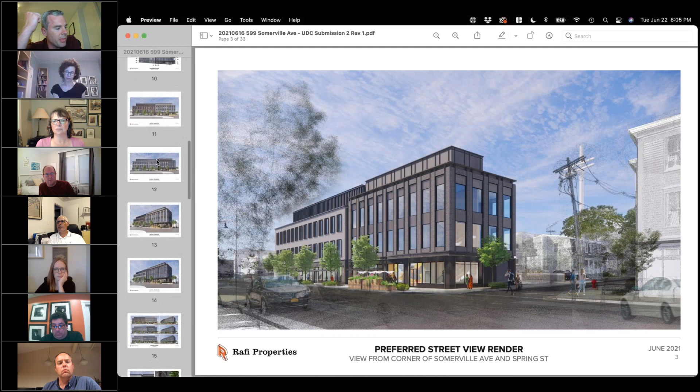Yeah, there's one that I'd like to consider designating. It's design guideline E: vents, exhausts, and other utility features on the building facade should be architecturally integrated into the design of the building and should be located to minimize adverse effects. I think especially given the tightness of the site, its proximity to the street, and its proximity to surrounding residential properties, that's going to be really important to understand as the project moves forward through the process, especially when it gets to the planning board.

So I know all those things haven't been identified yet, we didn't really focus on it. One item that came up last time was the exhaust of the parking at grade along the rear property line of the building, which I think is problematic. If there's the opportunity, it could be exhausted out the roof of the building. So I think that should be explored, or it should otherwise be demonstrated that there's really no adverse effect to exhausting at grade acoustically or in terms of exposure to dirty air or otherwise. So I'd like to designate that one.

All right, so we have a motion. Tim, this is your motion to designate design guideline E regarding vents and exhausts as a priority design guideline moving forward. Do we have a second on that motion? Second. Seconded by Andrew. Roll call vote. Deborah? Yes. Tim? Yes. Andrew? Yes. And Frank? Yes.

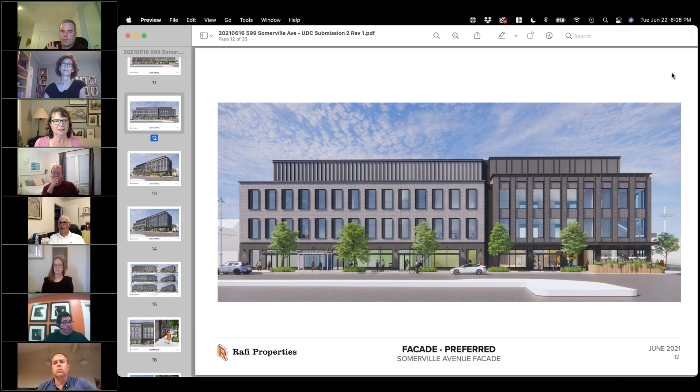And I believe that's the end of our votes this evening. So congratulations to the team. Thank you very, very much. Under 40 minutes too. Thank you. Thank you all for the guidance, appreciate it. We'll look forward to moving the building forward now. Thanks a lot, thank you very much.

Great, thank you. Have a great evening, have a good evening. Bye all, thanks, appreciate it. Thank you, bye.

All right team, then we just have one more motion, and that I believe is to adjourn, unless Andrew is going to tell me I missed something again. Nope, we are all set.

Move to adjourn. Second. Motion by Deborah, seconded by Frank, quite loudly. And a roll call vote. Frank? Yes. Tim? Yes. Andrew? Hard yes. Deborah? Yes. All right, thank you all. Meeting adjourned at 8:09 p.m.

Oh, well done, woohoo. Good night, everyone. Good night, thank you everybody. Take care, have a nice dinner. Bye.